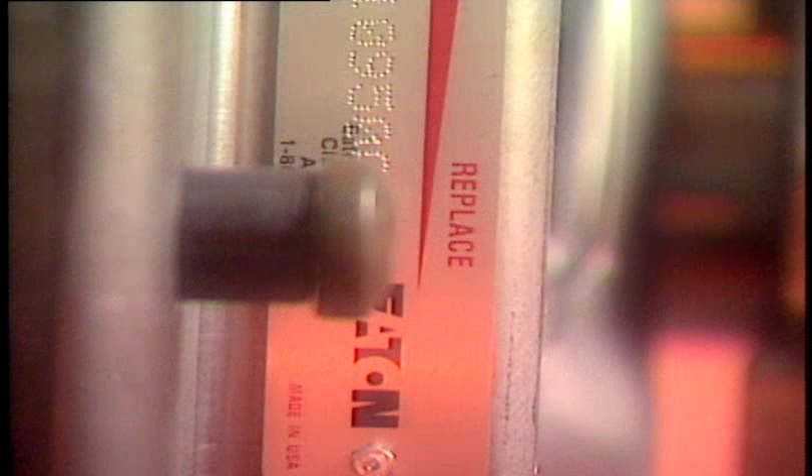Eaton Fuller stamped angle spring clutches should be replaced when adjustment cannot correct for a loss of free pedal or cannot compensate for a slipping clutch. Eaton Fuller Solo clutches should be replaced when the wear indicating tab is at the replace position.

Eaton has two versions of the Solo, one for standard stroke linkages and one for short stroke linkages. The short stroke Solo is designed for use with hydraulic type linkages and also the GM truck cable linkage system.

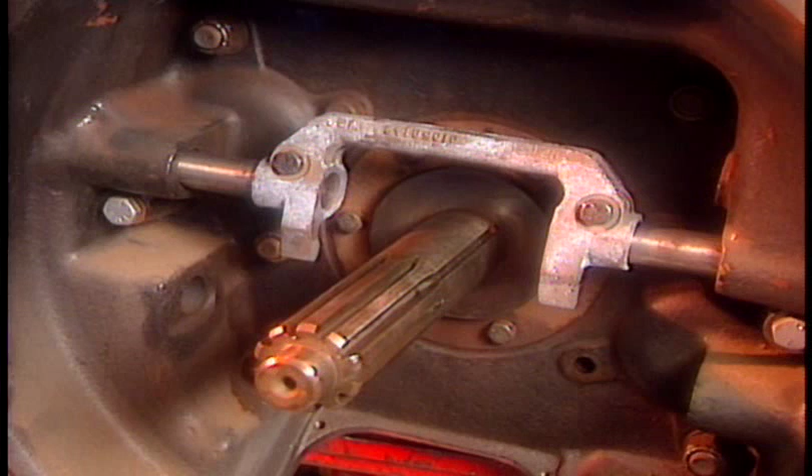Of these two types of Solo clutches, you have a choice between the original Solo or the maintenance-free version, both available in a single or double disc model. The original version uses a common release yoke combined with a greasable release bearing. This non-sealed bearing requires lubrication every 10,000 miles using an EP number 2 grease.

On the other hand, the maintenance-free version requires the use of a special roller yoke combined with a lubed-for-life release bearing. This sealed bearing requires no further lubrication. The roller yoke is packaged with the clutch. For further details, refer to the medium-duty application guide.

Attach either a sling or jack to the transmission. Next, remove the transmission mounting bolts and disconnect the external clutch linkage, making sure the release yoke will clear the release bearing as you move the transmission rearward. Don't let the rear of the transmission drop or hang unsupported. The discs can be bent or distorted, thus preventing the clutch from releasing cleanly should you desire to reuse it.

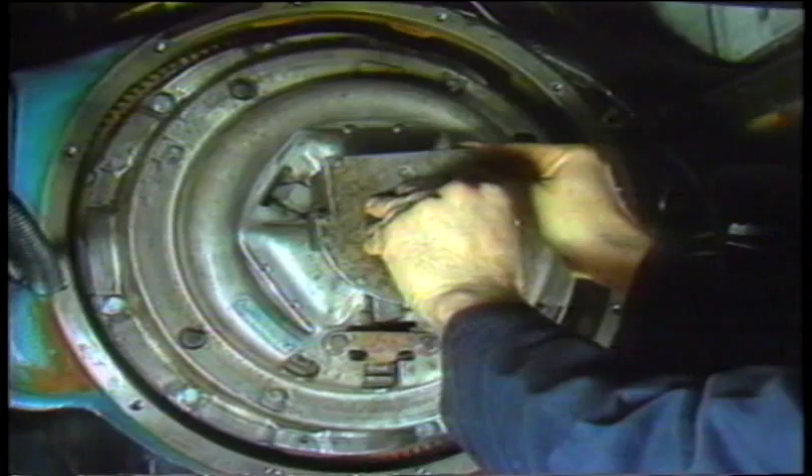Install a spline aligning tool through the release bearing, into the driven discs, and also into the inner race of the flywheel pilot bearing. You can use an old transmission input shaft for this purpose. If the clutch being replaced is a 2-plate angle spring, pull the bearing back using the release tool shown and insert 2 5/8" thick shipping blocks.

If the clutch is a single plate angle spring, insert 2 1 3/4" thick shipping blocks on the single plate model. This will prevent breaking the retainer and keep the levers from coming out of the retainer slot. Installing the wooden shipping blocks also helps ensure that the clutch will release cleanly should you wish to reinstall it.

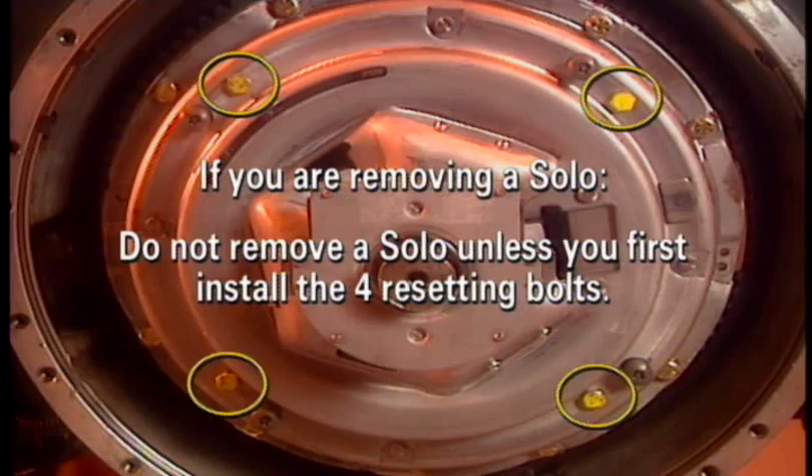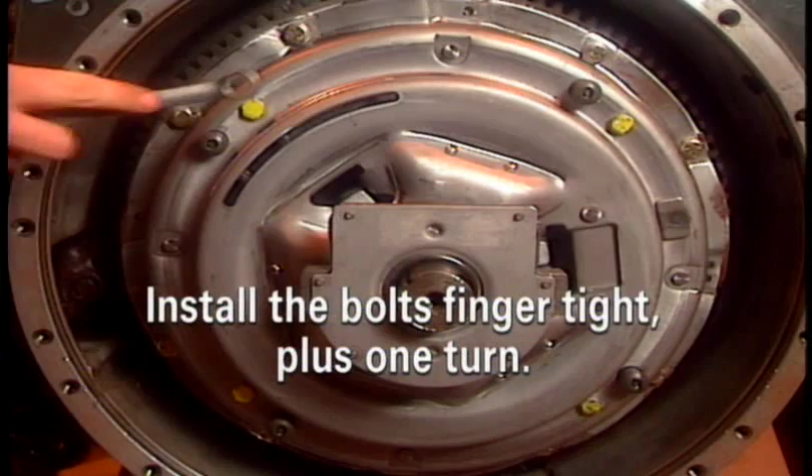If you are removing a Solo, do not unbolt the clutch from the flywheel unless you first install 4 shipping resetting bolts. The medium-duty 14-inch Solo uses size 3/8" by 16 by 1 1/4" coarse thread. Install the bolts finger tight plus 1 turn. Now you can carefully remove the clutch. The out-of-the-truck resetting procedure will be described later in this video.

Failure to first install the 4 shipping bolts prior to the clutch's removal from the flywheel will necessitate the use of this resetting procedure. Remove 2 of the mounting bolts at the top of the clutch cover and install 2 guide studs in their place. Take out the remaining 6 mounting bolts and carefully remove the clutch. Since this part is heavy, you may want to use a hoist to ensure easier handling of the clutch.

If you need to temporarily remove a Solo clutch, the following 9-step procedure must be performed prior to the clutch's removal from the flywheel. Failure to perform these steps will cause the Solo to drag or to not release upon reinstallation. Note, if the wear indicating tab is at or near the replace position, you can disregard the following 9-step process and install a new Solo clutch at this time.

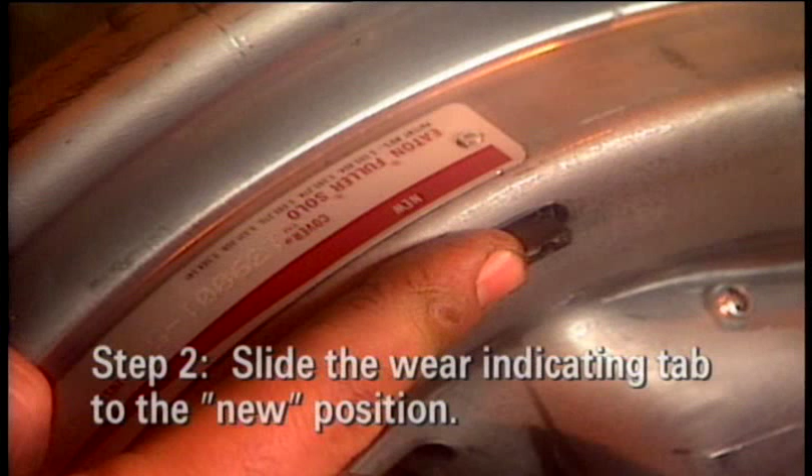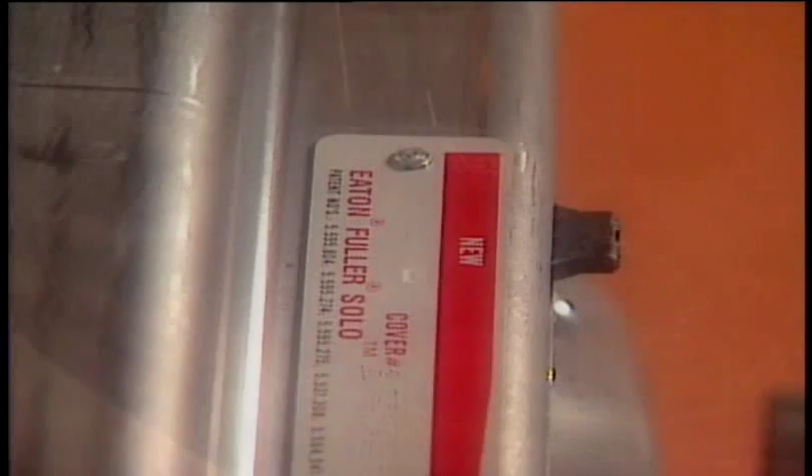Also, if the Solo clutch was removed without first installing the 4 shipping bolts and you now wish to reinstall the clutch, you must perform the out-of-truck resetting procedures described later in this video. The first step in the removal and reinstallation of a Solo clutch is to fully depress the clutch pedal and hold at this position. Next, slide the wear indicating tab to the far left and hold at this new position. Let up on the clutch pedal. The tab will remain at the new position.

Carefully remove the transmission, being sure to support its weight so that no damage will occur to the release bearing assembly and driven discs. Install 4 3/8" by 16 by 1 1/4" coarse thread machine screws finger tight. Using a 9/16" wrench, tighten each bolt one turn. These 4 shipping bolts will cage the pressure plate, thus preventing the 4 plate spacers from moving out of position during the clutch's removal from the flywheel.

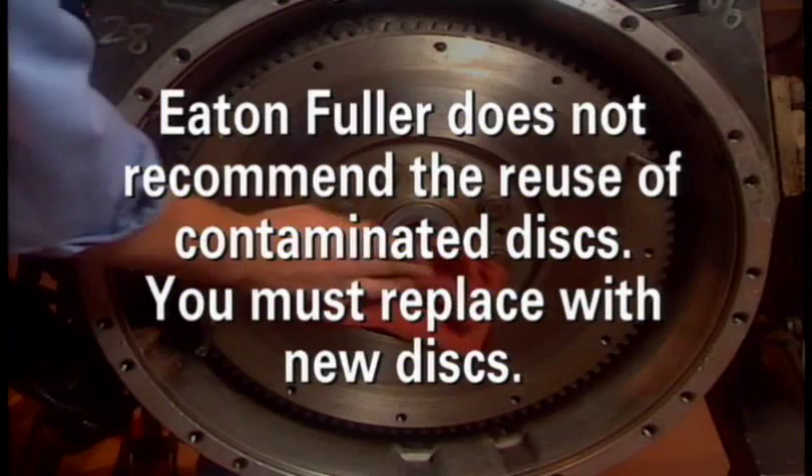Carefully remove the clutch from the flywheel, being sure to mark all the clutch parts so they can be properly oriented during reinstallation. Inspect the ceramic buttons and their mating parts for an oily or grease-covered condition, being sure to eliminate the source of this contamination before the clutch is reinstalled. Please note, Eaton Fuller does not recommend the reuse of contaminated discs. You must replace with new discs.

Using a 9/16" wrench, progressively tighten the 4 shipping bolts in a crisscross pattern until the face of the pressure plate is 525 thousandths of an inch minimum below the mounting surface. Important: failure to perform this step properly may cause the Solo clutch to drag or to not release upon reinstallation.

Reinstall the clutch according to the Solo installation procedures shown later in this video, being careful to properly reorient the clutch parts.

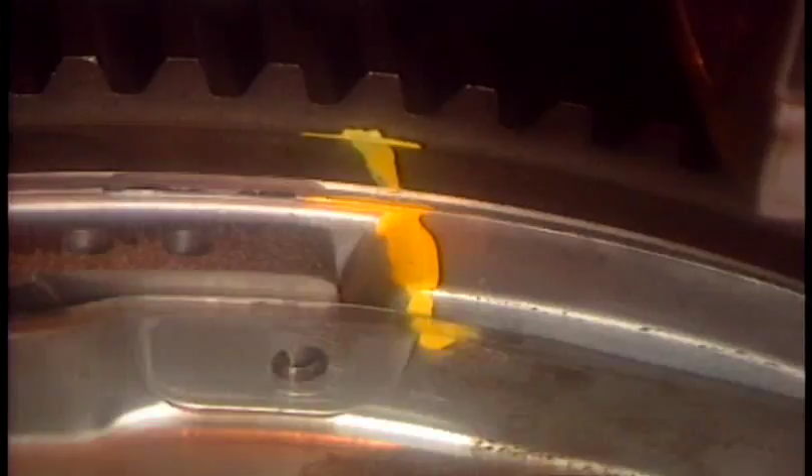Inspect the mating surfaces of both the flywheel housing and the transmission bell housing. Any appreciable wear on either housing will cause misalignment. Most wear will be found on the lower half of these surfaces, with the most common wear areas between the 3 and 8 o'clock positions. Replace the clutch housing if it is worn.

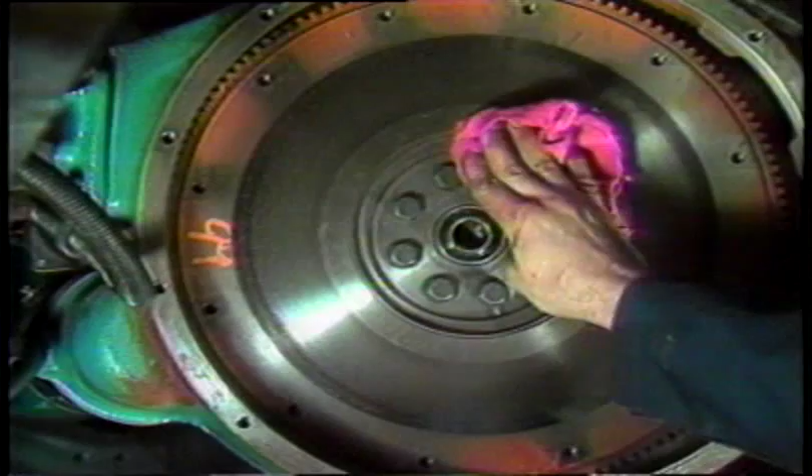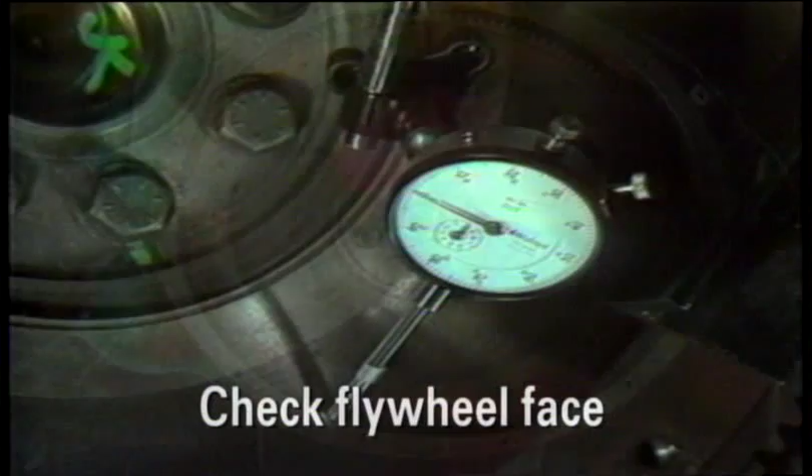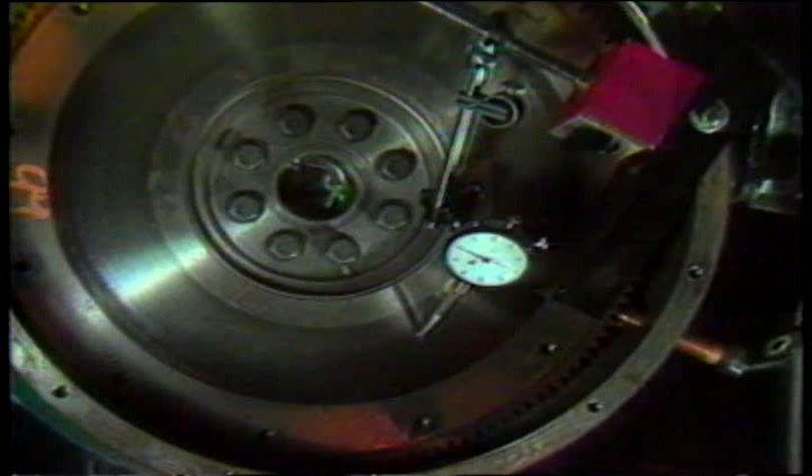Before you begin the following run-out checks, remove the 2 guide studs installed earlier and also make sure that all gauging surfaces have been wiped clean. Begin the first run-out check by securing the dial indicator's base to the engine housing with the gauge finger on the face of the flywheel. Rotate the flywheel 1 full revolution. For a Solo clutch, the maximum allowable total run-out is 7 thousandths.

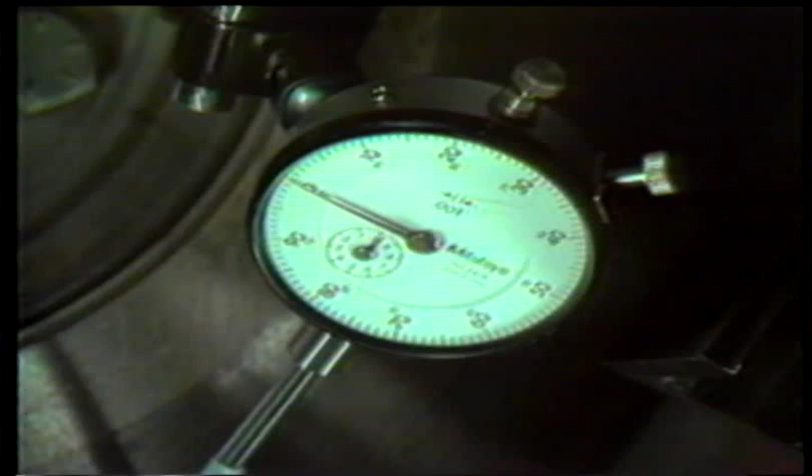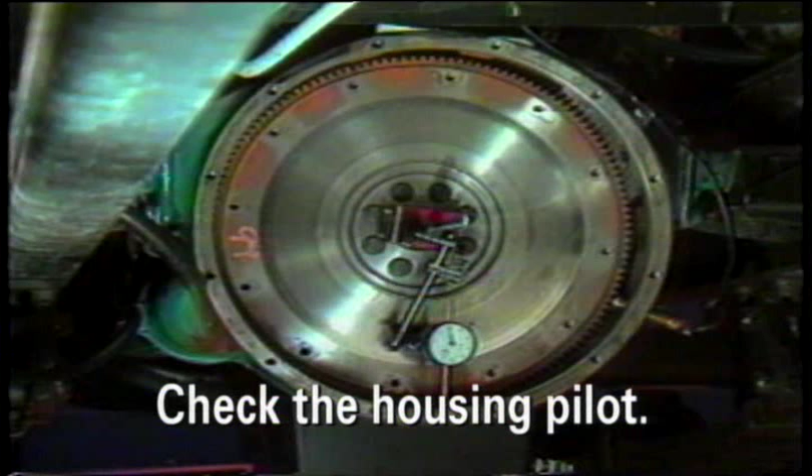Proceed to the second run-out check by moving the gauge finger so that it contacts the pilot bearing bore surface. Again, rotate the flywheel 1 full revolution. The maximum total allowable run-out is 5 thousandths. Begin the third run-out check by securing the dial indicator's base to the center of the flywheel. Next, move the gauge finger until it contacts the flywheel housing pilot. Rotate the flywheel 1 full revolution and mark the high and low points. The total indicated difference between the high and low points must be 8 thousandths or less.

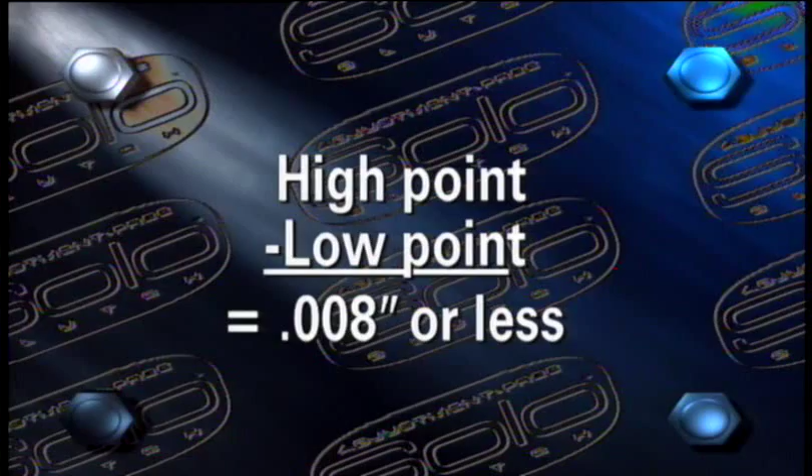For the fourth and final run-out check, secure the dial indicator's base to the outer edge of the flywheel and then move the gauge finger until it contacts the face of the flywheel housing. Again, rotate the flywheel 1 full revolution while you mark the high and low points. The total run-out should not exceed 8 thousandths. If any of the 4 previous limits are exceeded, the problem must be corrected, or the resulting misalignment will cause disc damper failures and potential damage to other drivetrain components. This completes the inspection portion of the clutch job.

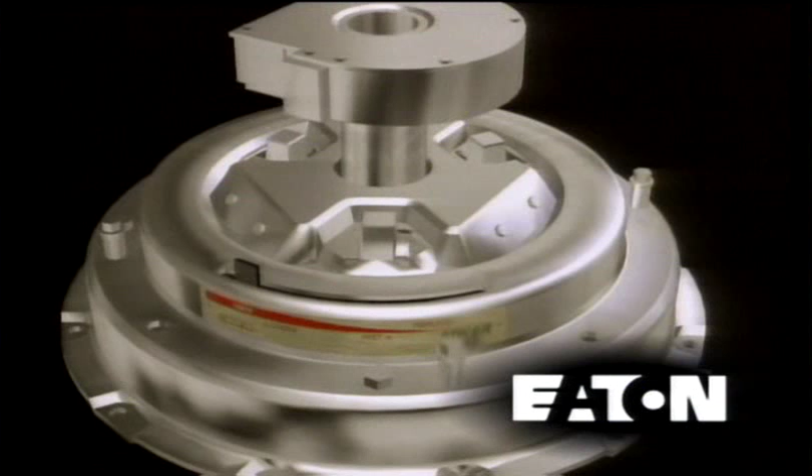A closer look at Solo's components reveals how Eaton's engineers have been able to create an adjustment-free clutch. Critical to the clutch's success are its pressure plate and plate spacers, which are exclusive to the Solo design. There are 4 plate spacers located symmetrically about the Solo. The plate spacers assure proper plate separation throughout the life of the clutch and sense the need for clutch adjustment.

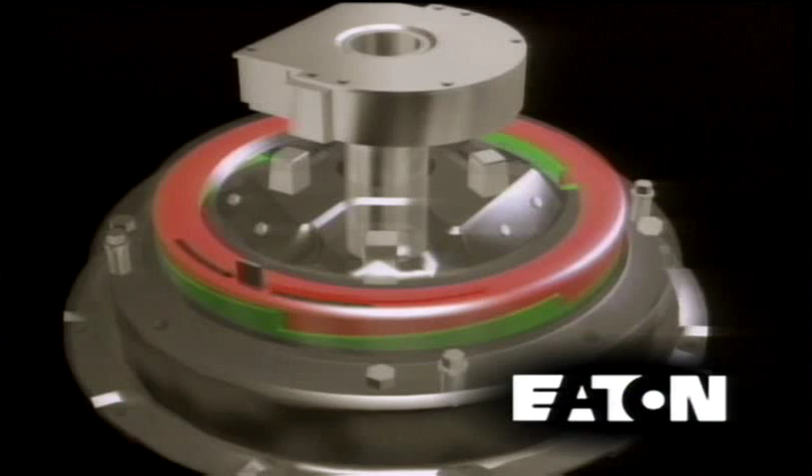Solo also includes patented cams made of a strong composite material that withstands the harshest of conditions. And because there are no threads, the possibility of frozen rings is eliminated. Atop the cams is a wear indicating tab that mirrors the movement of the cams. This highly visible tab can be seen through an opening in the bell housing to determine the remaining clutch life.

So how exactly does the revolutionary Solo work? When the installation process is completed, the transmission is installed as in the past, and the clutch linkage is hooked up. This is where it really gets easy. To set the clutch, just actuate the pedal in the cab 5 times. As the release yoke pulls the release bearing back, the cams set the release bearing to the proper position. The clutch linkage is then set to 1/8 inch between the yoke and the wear pads.

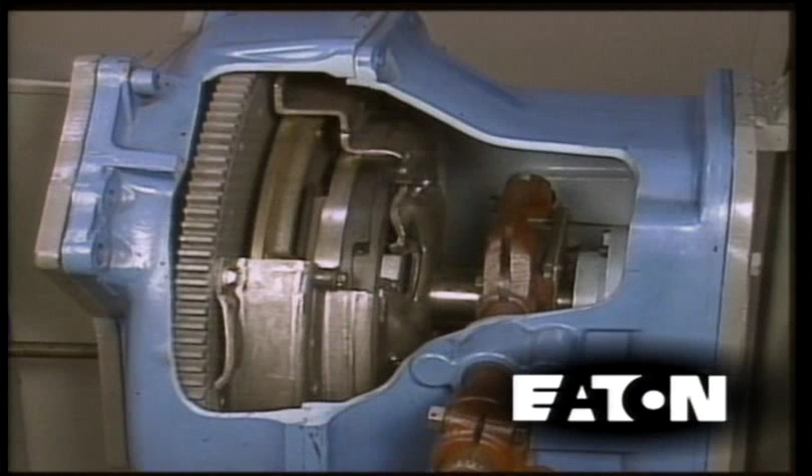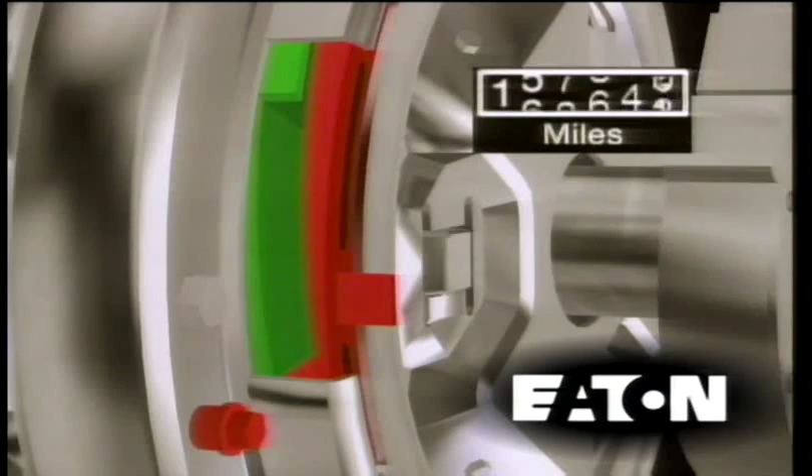Now the clutch is set, and with each ensuing push of the pedal, the cams adjust for any wear in the clutch. As wear occurs, the plate spacers will reset themselves to allow the cams to sense for wear. The plate spacers set on the engaged stroke to compensate for wear. The cams will reposition themselves on the next release stroke to compensate for the wear. When no clutch wear has taken place, the cams will not reposition.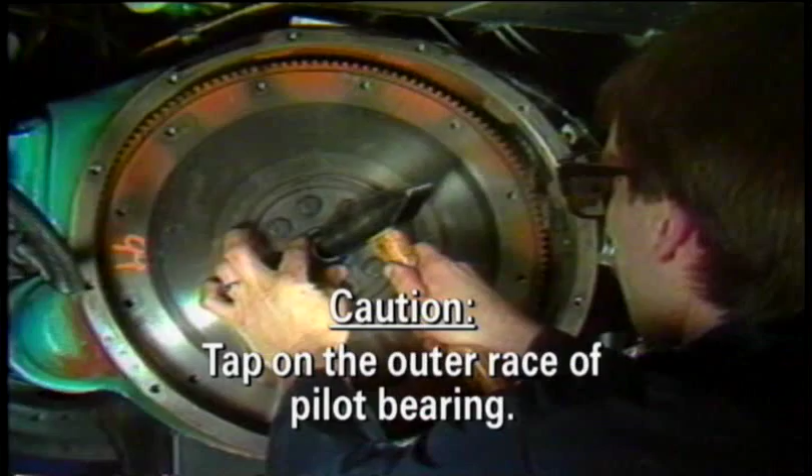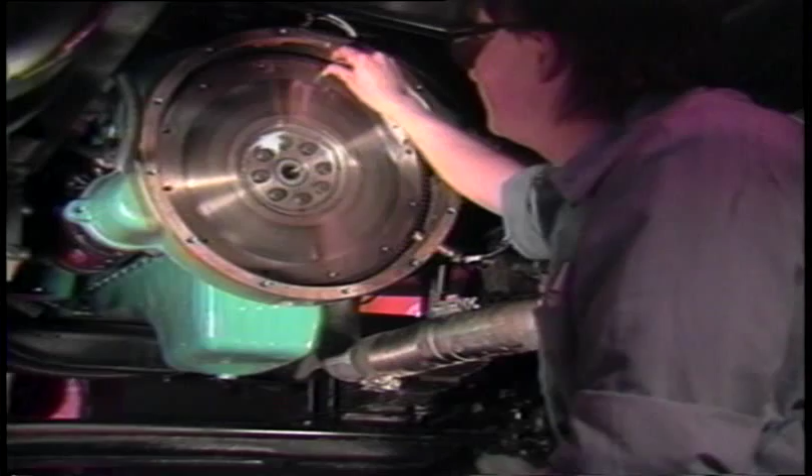Install a new premium grade pilot bearing, C3 to C4 to C5 fit. Caution: tap on the outer race of the pilot bearing only and make sure it is seated properly in the bearing bore. This bearing must have a press fit. Install 2 guide studs, 3/8 inch by 16 thread by 3 inches long. Install the disc by inserting the aligning tool through the splines and then into the pilot bearing. Make sure the side-marked pressure plate side faces the pressure plate.

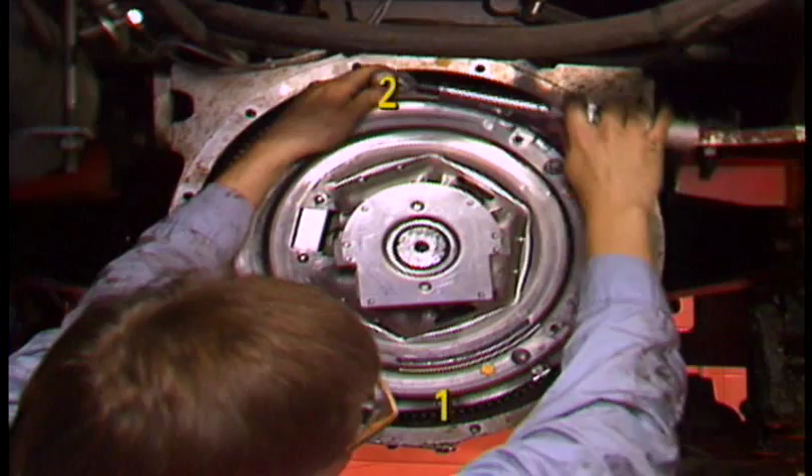With the aligning tool still in place, carefully slide the clutch assembly over the aligning tool and onto the 2 guide studs. Start 8 3/8 inch grade 5 or better mounting bolts with lock washers and tighten them finger tight. Using a torque wrench, progressively tighten the 8 bolts in a crisscross pattern by starting with the lower left-hand bolt. The final torque of each bolt should be 30 to 35 pounds-foot. Failure to tighten the bolts in this manner can cause permanent damage to the clutch cover, creating an out-of-balance condition, or cause the release bearing to be stuck rearward toward the nose of the transmission.

Remove the 4 yellow-colored shipping resetting bolts in a progressive crisscross pattern. This will allow the pressure plate to move toward the engine and will clamp the disc to the flywheel. Save these bolts for future resetting or removal of a Solo.

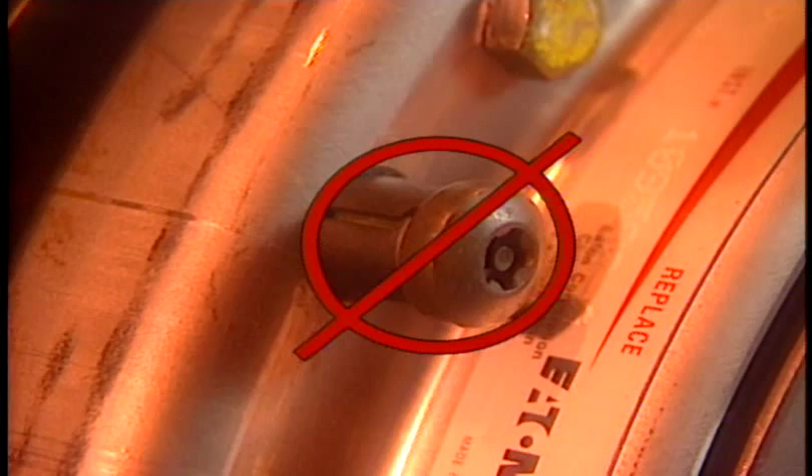Do not tamper with the 4 plate spacer bolts located next to each shipping bolt. They are designed for factory use only. Remove the aligning tool. Installation of the Solo 1401 clutch is now complete.

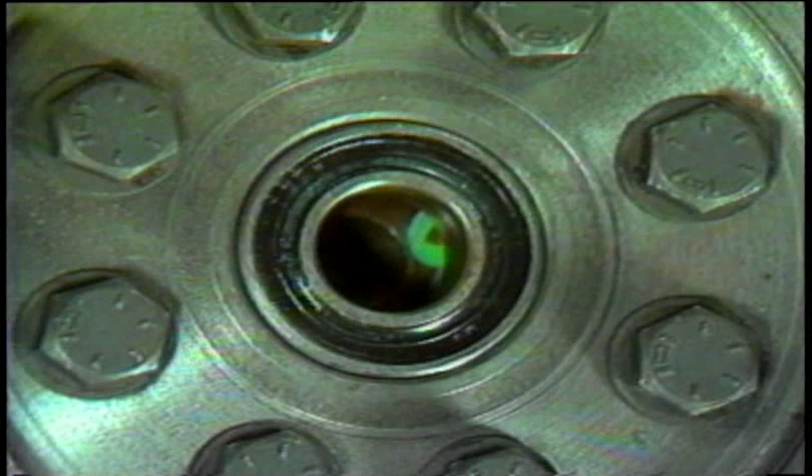Install a new premium grade pilot bearing, C3 to C4 to C5 fit. Caution: tap on the outer race of the pilot bearing only and make sure it is seated properly in the bearing bore. This bearing must have a pressed fit. Install 2 guide studs, 3/8 inch by 16 thread by 3 inches long.

Install the front disc by inserting the aligning tool through the splines and then into the pilot bearing. Make sure the side marked flywheel side faces the flywheel. Install the intermediate plate assembly over the 2 guide studs and slide it forward until it touches the flywheel. Make sure the side marked pressure plate side is facing the pressure plate. The drive straps must face the pressure plate.

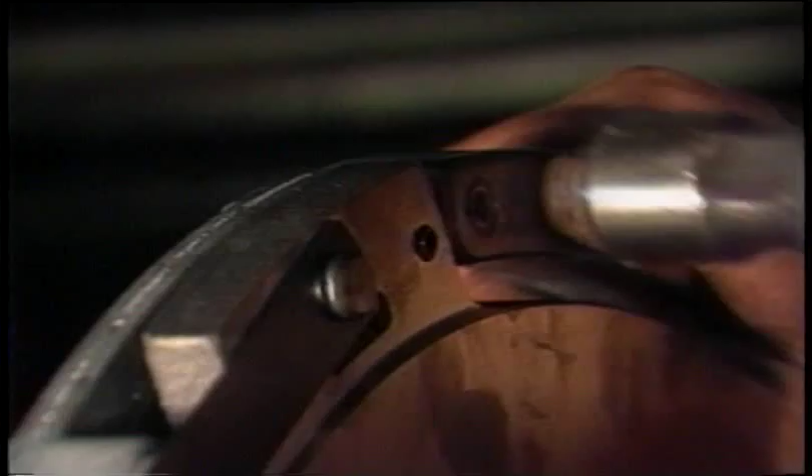Also, make sure the 4 positive separator pins in the intermediate plate are flush on the side that faces the pressure plate, protruding on the side that faces the engine flywheel. Remove the aligning tool and install it through the splines of the rear disc. Insert the aligning tool through the front disc and then into the pilot bearing.

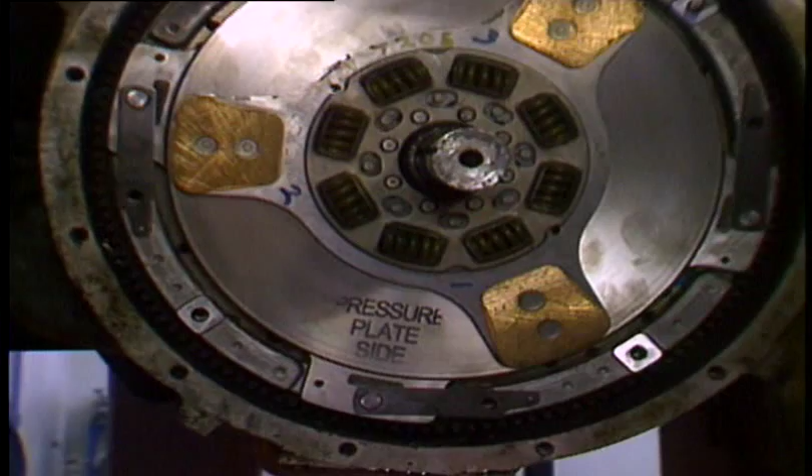Make sure the side of the disc marked pressure plate side is facing the pressure plate. As you perform this step, align the buttons of the front and rear discs as closely as possible. Doing so will aid the function of the positive separator pins. With the aligning tool still in position, carefully slide the clutch assembly over the aligning tool and the 2 guide studs until it rests against the intermediate plate assembly.

Start 8 3/8-inch grade 5 or better mounting bolts with lock washers and tighten them finger tight. Using a torque wrench, progressively tighten the 8 bolts in a crisscross pattern by starting with the lower left-hand bolt. The final torque of each bolt should be 35 to 40 pound-feet. Failure to tighten the bolts in this manner can cause permanent damage to the clutch cover or create an out-of-balance condition.

Remove the 4 yellow-colored shipping resetting bolts in a progressive crisscross pattern. This will allow the pressure plate to move toward the engine and clamp the discs to the flywheel. Save these bolts for future resetting or removal of a Solo. Do not tamper with the 4 plate spacer bolts located next to each shipping bolt. They are designed for factory use only. You may now remove the aligning tool.

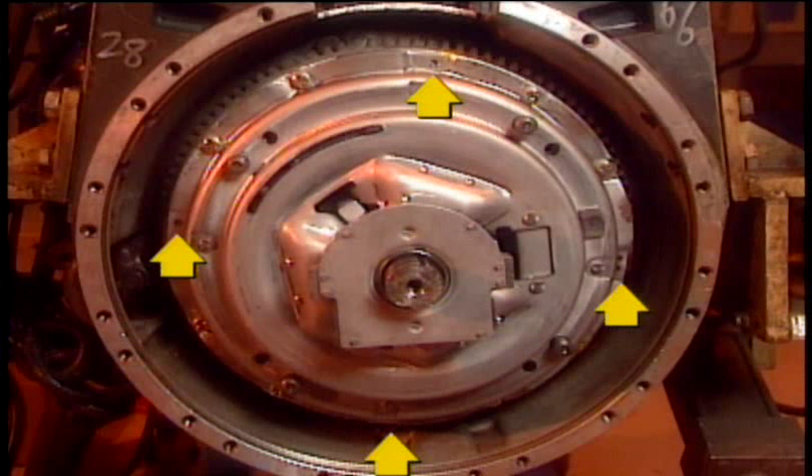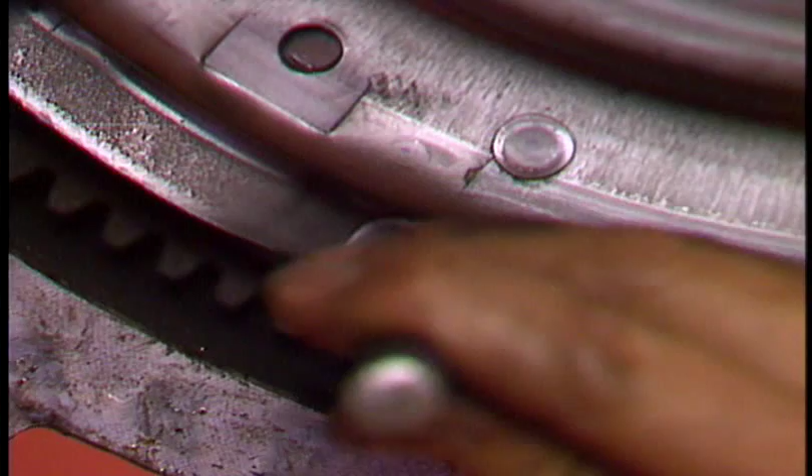Using a lightweight hammer and a 1/4 inch flat-nosed punch, lightly tap the 4 positive separator pins via the access holes on the clutch cover until each pin is touching the flywheel. Failure to set these pins properly will cause the clutch to drag, resulting in a poor release complaint. Installation of the Solo 1402 clutch is now complete.

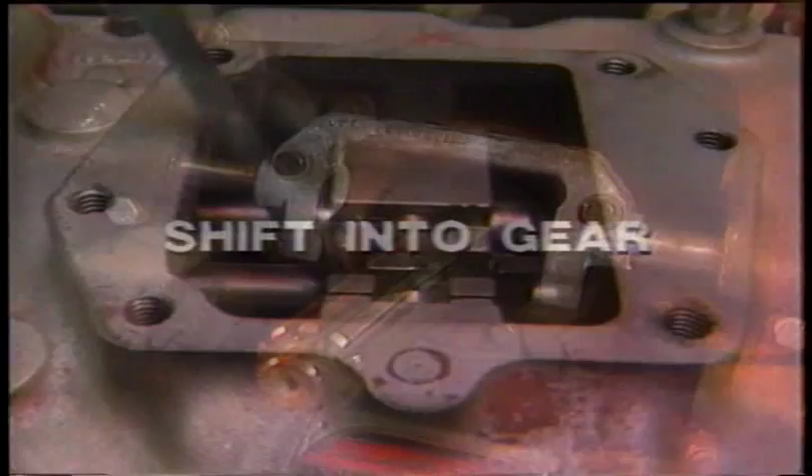Before installing the transmission, make sure it has been shifted into gear. If the truck is equipped with a non-synchronized transmission, install a new Eaton Fuller clutch brake at this time, being sure to check the front of the transmission bearing cap for excessive wear. Replace the cap if worn excessively. Clutch brakes will never be used with synchronized transmissions.

Check the release yoke fingers for excessive wear. Replace if worn excessively. Coat the yoke fingers with grease to prolong the life of both the fingers and also the wear pads on the release bearing. Check the cross shafts and bushings for excessive wear.

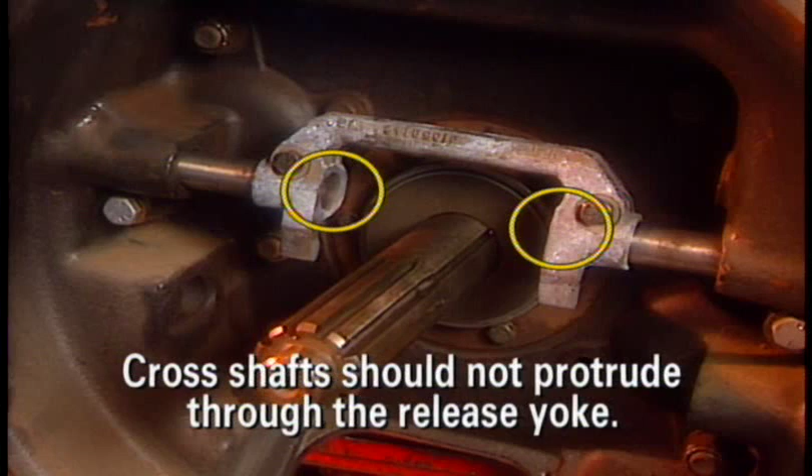Replace if worn excessively. Make sure the cross shafts do not protrude through the release yoke, since this could cause a side-loading condition between the release bearing sleeve and the transmission input shaft. Excessive wear at the cross shafts and bushings can also lead to a side-loading condition, which may result in a poor release complaint.

There should be zero wear on the input shaft splines. Even slight wear can cause a non-release condition once the new driven discs have been installed over the worn splines. Do not apply grease or anti-seize on the input shaft. Use only a light coat of oil to aid in installation.

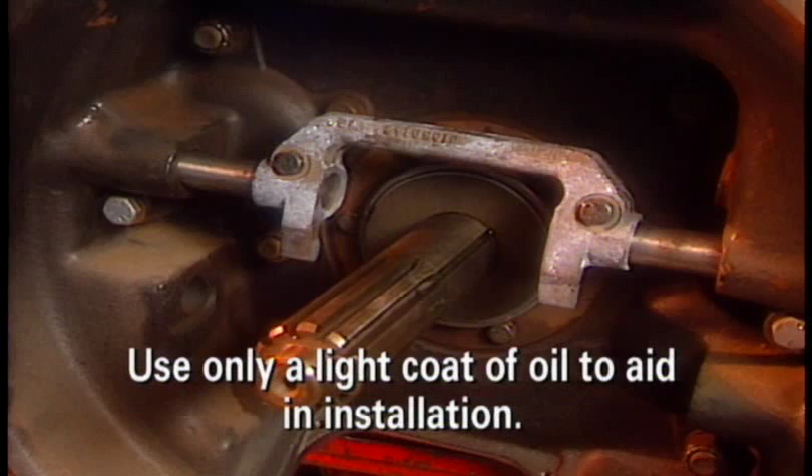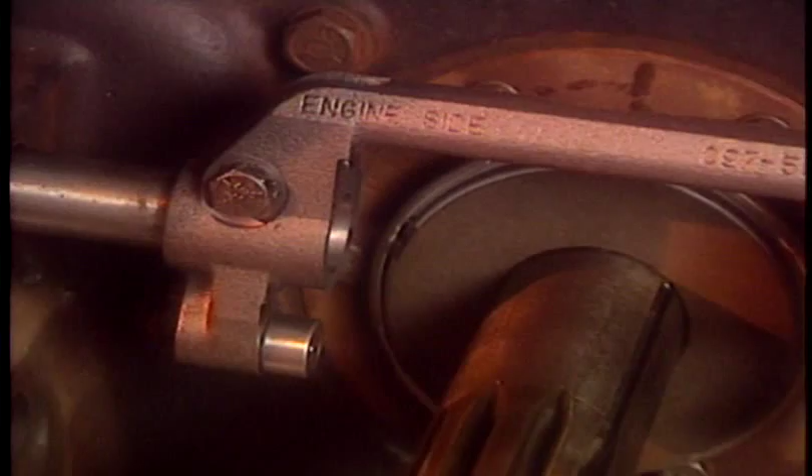Check for worn linkage pivot points. Replace any parts which are worn excessively. If you have installed a maintenance-free version of the Solo clutch, you must install the roller-type yoke package with this clutch. It is a specially designed release yoke which will function only with the maintenance-free Solo. Important: the roller yoke must be installed with the engine side notation facing the engine.

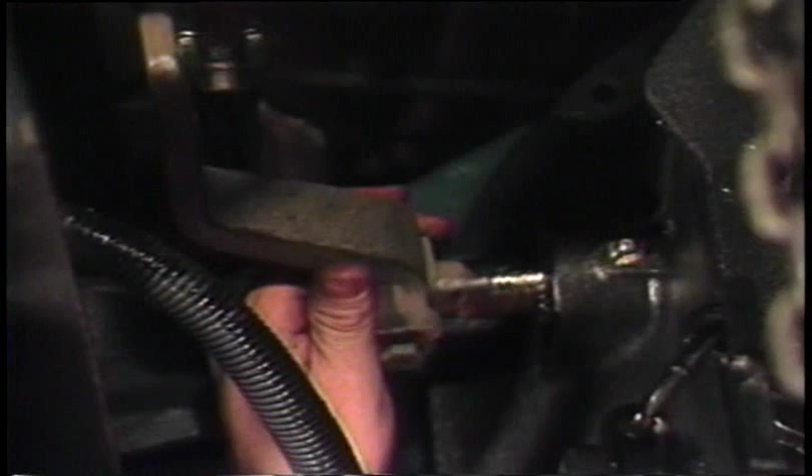Make sure that the transmission is square to and aligned with the engine when it is raised into position. Lift the release yoke so that it clears and is rotated over the wear pads of the release bearing as the transmission is moved forward. Be careful. The release yoke fingers must be elevated to the straight out position. Both the clutch cover and release yoke fingers can become damaged when moving the transmission forward.

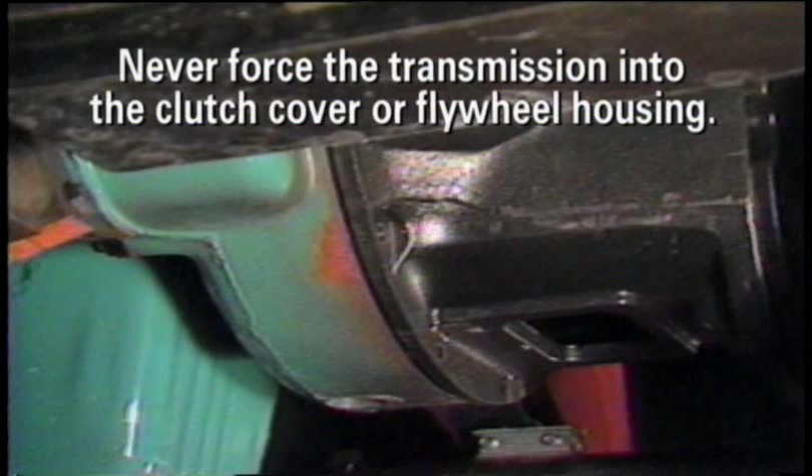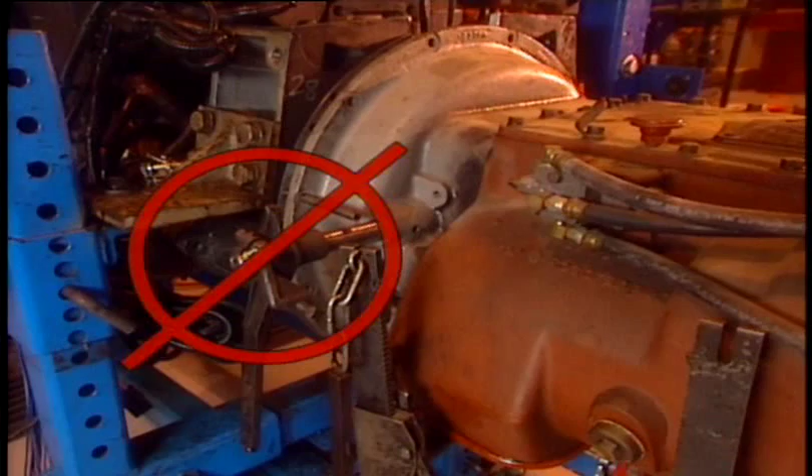Move the transmission forward, but never, and we repeat, never force the transmission into the clutch cover or flywheel housing. If it doesn't enter freely, investigate the cause and make any necessary changes. Do not use the clutch release arm to pull the transmission into the engine housing. Doing so will cause the release bearing to adjust too closely to the transmission bearing cap or clutch brake. As a result, you might experience a dragging clutch due to shortened bearing travel.

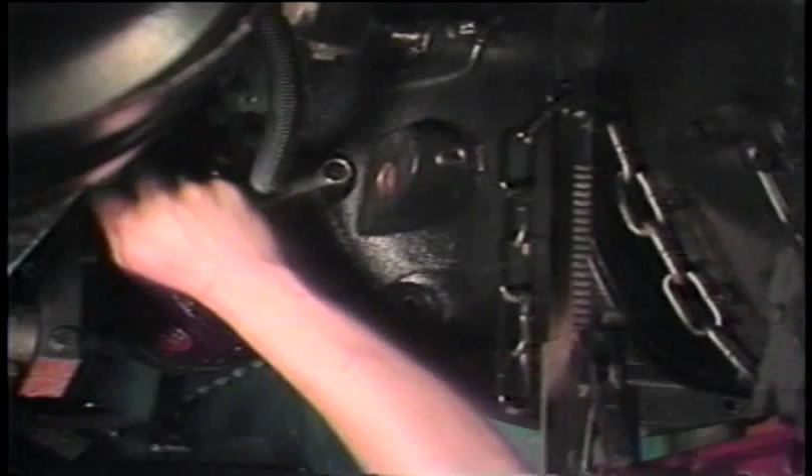Do not let the rear of the transmission drop or hang unsupported in the driven discs. The discs can be bent or distorted and will cause a no-release condition or broken damper disc. Mate the transmission with the engine flywheel housing and install the mounting bolts. Torque the bolts based upon the manufacturer's recommendations. This completes the transmission portion of the clutch job.

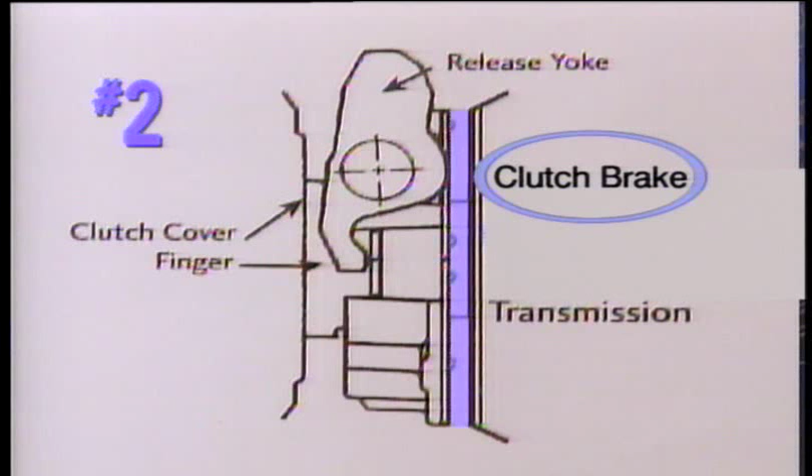To properly set up the Solo, the yoke must move the release bearing until one of the following occurs. 1. The bearing hits the transmission nose. 2. The bearing hits the clutch brake. This is for non-synchronized transmissions. 3. The bearing cannot be further moved and has hit the internal stop of the clutch cover.

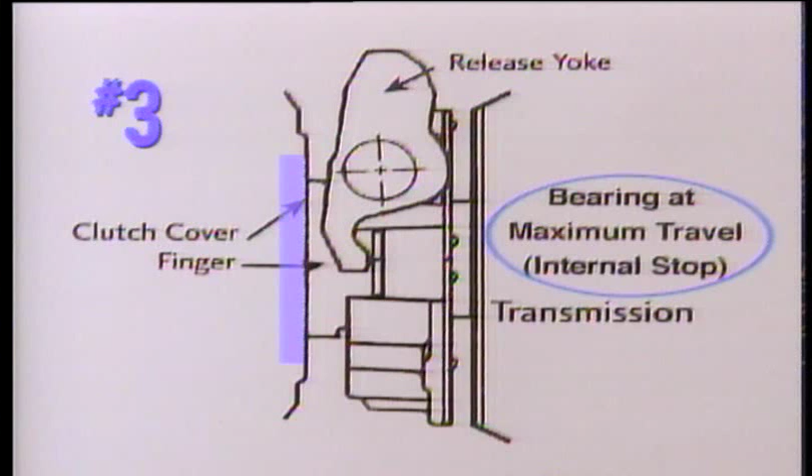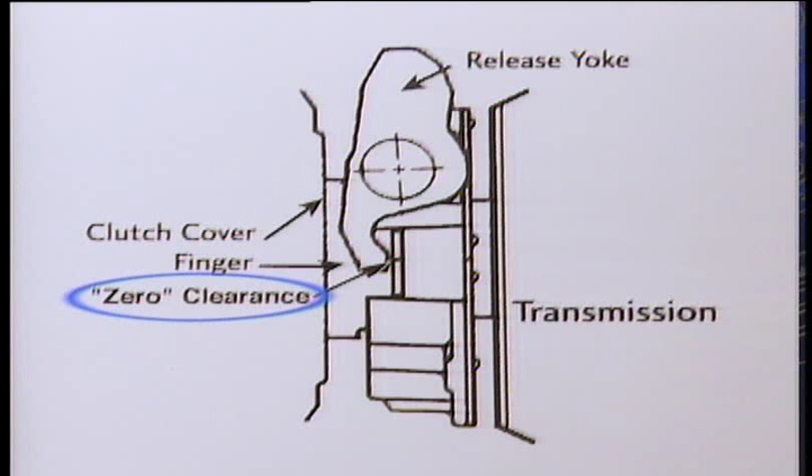Adjust the truck linkage until you have zero clearance between the release bearing wear pads and release yoke. Setting the yoke to contact the bearing pads will allow for maximum stroke to the bearing and allow the clutch to set itself to the specific truck. The bearing must move slightly more than 9/16 of an inch in order for the Solo to adjust fully. Fully depress and release the clutch pedal in the cab 5 times.

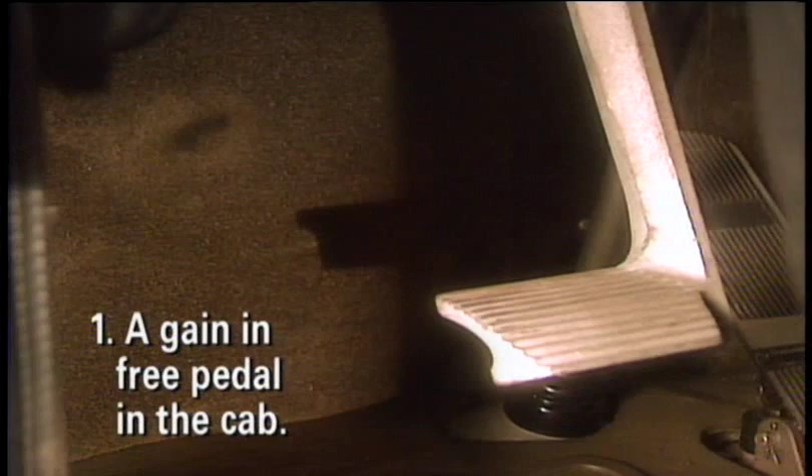Indications that the Solo is adjusting will be: 1. A gain in the free pedal in the cab. 2. Movement of the wear indicator on the clutch away from the new position slightly toward the replace position. 3. The release bearing seats itself closer to the transmission nose.

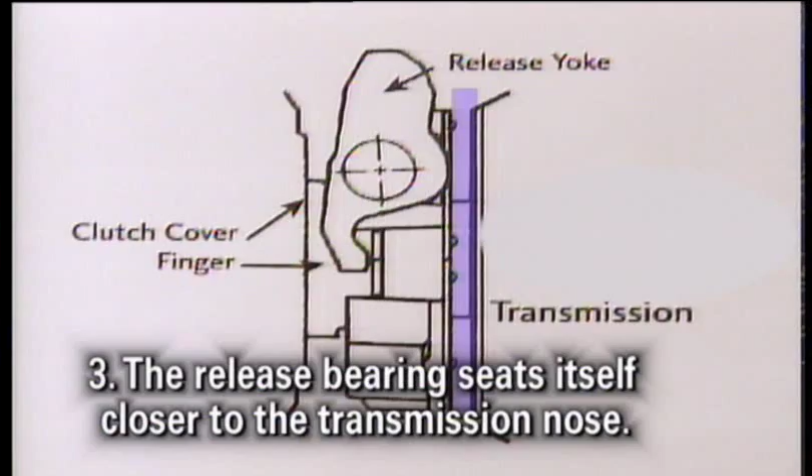Note, the Solo will set itself based on the distance you pull the bearing. Do not attempt to adjust the bearing position by prying or hitting on the wear indicator, for it is easily broken off. In addition, manually moving the wear indicating tab will not alter the final position of the release bearing. The wear indicator is a visual indication of when to replace the clutch. If the tab has been broken, it has no effect on the function or life of the clutch.

If the bearing movement is not stopped at the end of the stroke by the transmission, clutch brake, or internal stop, again reset the yoke clearance to 0 and again depress and release the pedal 5 times. Any gain in free play in the clutch pedal indicates that this second adjustment was necessary. The Solo should now be fully adjusted.

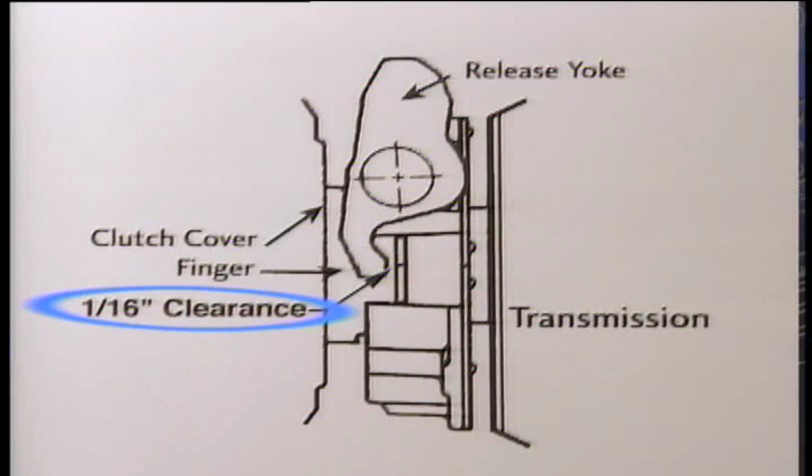The next step is to adjust the truck linkage and create a minimum of 1/16 inch clearance between the release yoke fingers and the bearing pads. This setting will create the correct free pedal in the cab. In some trucks, the pedal may stop off the floor. This is an acceptable condition and is a result of a linkage designed for maximum bearing movement.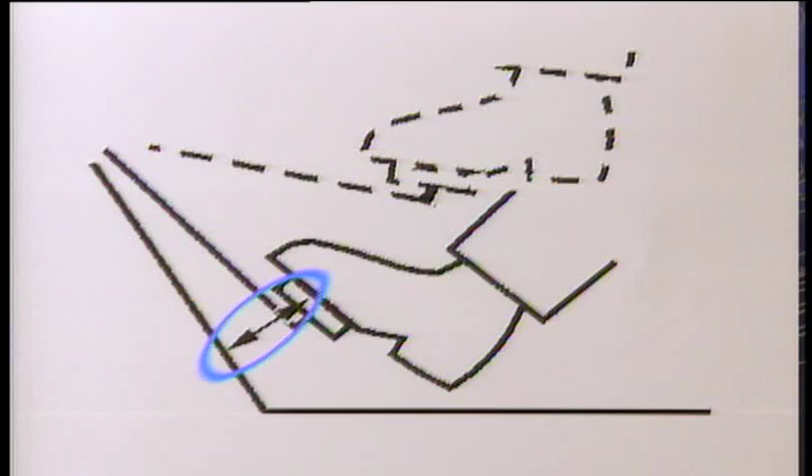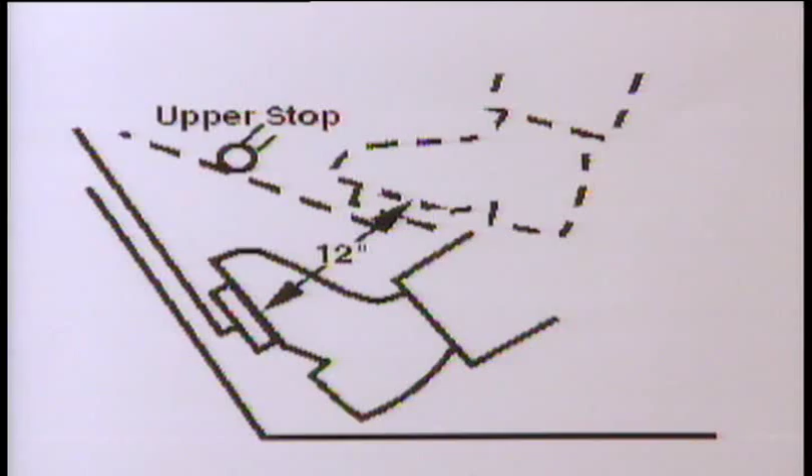However, if you prefer to lower the pedal at the end of the stroke, you must reduce the total in-cab pedal movement. For example, if you have a 12-inch pedal movement, lower the pedal 1 inch to create an 11-inch pedal movement. This will lower the pedal by 1 inch at the end of the stroke. You may need to modify or adjust the upper pedal stop bumper. Now reset the 1/16 inch minimum clearance between the release yoke and bearing.

If a clutch brake is used, verify that the clutch brake squeeze begins approximately 1/2 inch to 1 inch from the end of the pedal stroke. Adjusting the linkage to decrease the amount of free travel will increase the amount of clutch brake squeeze. Inversely, adjusting the linkage to increase the amount of free travel will decrease the amount of clutch brake squeeze. Note, clutch brake squeeze should be verified by inserting a 10/1000 feeler gauge between the bearing and clutch brake.

Lubricate the release bearing until lube purges out of the opening onto the transmission shaft. This will lube the bearing and bushing. Apply lube to the release yoke fingers as well as the cross shafts.

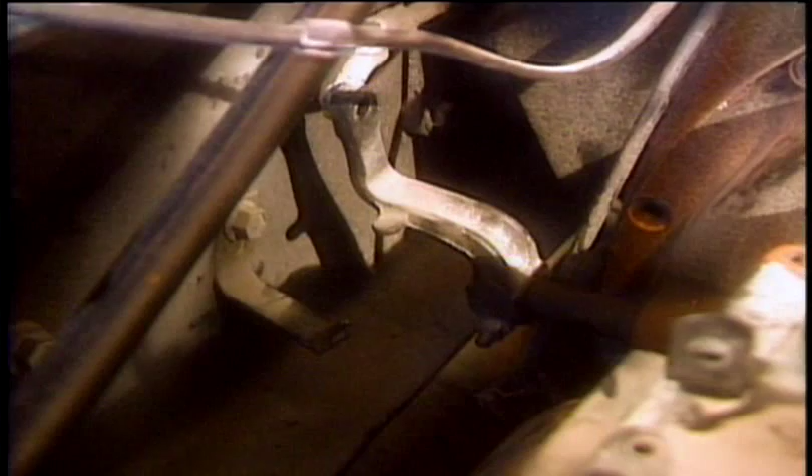If you can access the external clutch arm attached to the cross shaft, you can use the alternative setup procedure. Place a pipe or tool over the release arm and rotate the cross shaft to move the release bearing toward the transmission until it stops. The bearing should be moved until it contacts the transmission nose, hits the clutch brake, or is limited by the internal stop inside the clutch. Repeat this procedure 5 times.

Indications that the Solo is adjusting will be: 1. Movement of the wear tab from the new position slightly toward the replace position. 2. The release bearing will seat itself closer to the transmission nose. And 3. There will be an increase in free play at the clutch pedal.

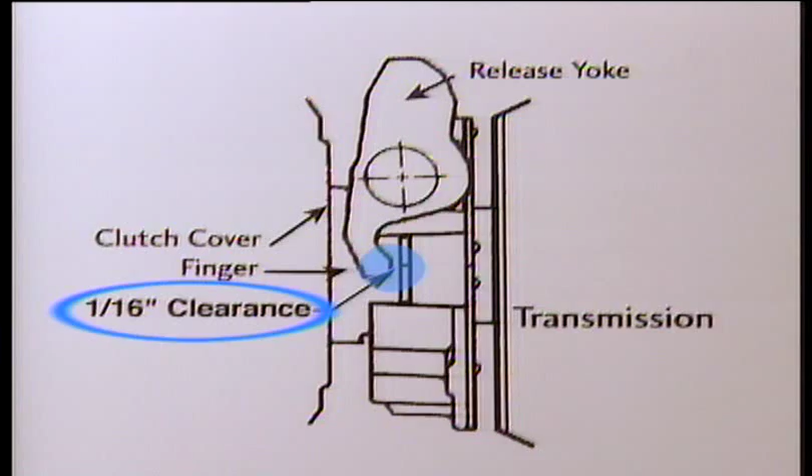Now install the truck linkage. Adjust the linkage to set the clearance between the release yoke fingers and the release bearing pads to a minimum of 1/16 inch. This will create the correct free pedal in the cab. Note, the Solo will set itself based on the distance you pull the bearing.

Do not attempt to adjust the bearing position by prying or hitting on the wear indicator, for it is easily broken off. Also, manually moving the wear indicating tab will not alter the final position of the release bearing. The wear indicator is a visual indication of when to replace the clutch. If the tab has been broken, it has no effect on the function or life of the clutch.

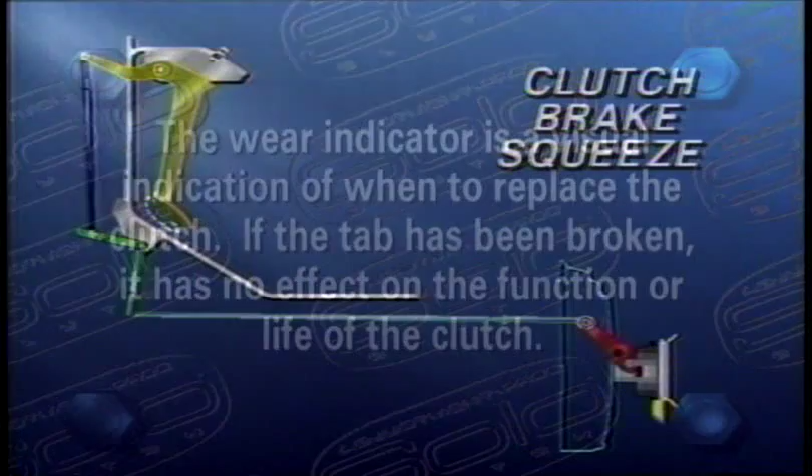If a clutch brake is used, verify that the clutch brake squeeze begins approximately 1/2 inch to 1 inch from the end of the pedal stroke. Adjusting the linkage to decrease the amount of free travel will increase the amount of clutch brake squeeze. Inversely, adjusting the linkage to increase the amount of free travel will decrease the amount of clutch brake squeeze.

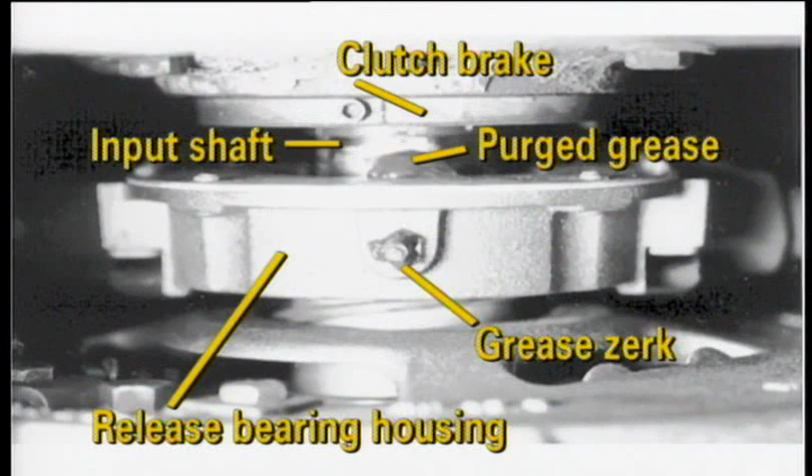Lubricate the release bearing until lube purges out of the opening onto the transmission input shaft. Including the release bearing, this excess grease will also prolong the life of the bronze bushing inside the release sleeve. Do not be concerned if grease gets onto the clutch brake, since it will not affect the brake's ability to stop the input shaft. Apply lube to the release yoke fingers, as well as the cross shafts.

The following resetting procedure is necessary if you: 1. Remove the clutch from the flywheel without first installing the 4 shipping bolts, and 2. Now wish to reinstall the Solo clutch. Failure to observe the following resetting procedures will prevent the clutch from releasing upon reinstallation. Please note, for future reference, this information is also available in the installation and adjustment wall charts packaged with each Solo clutch.

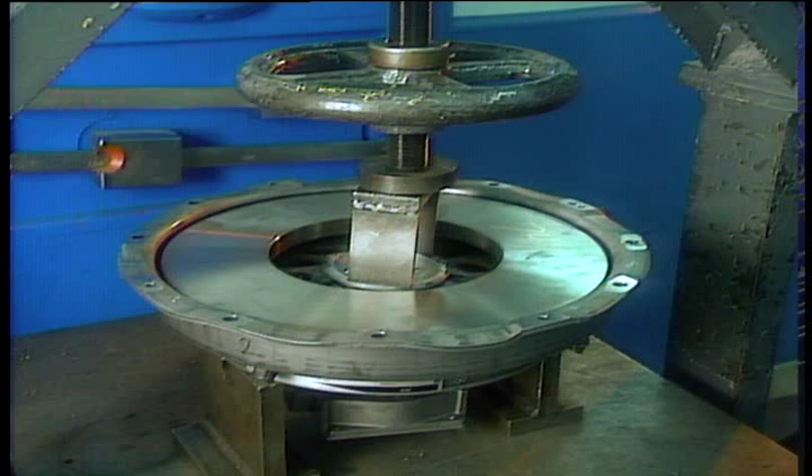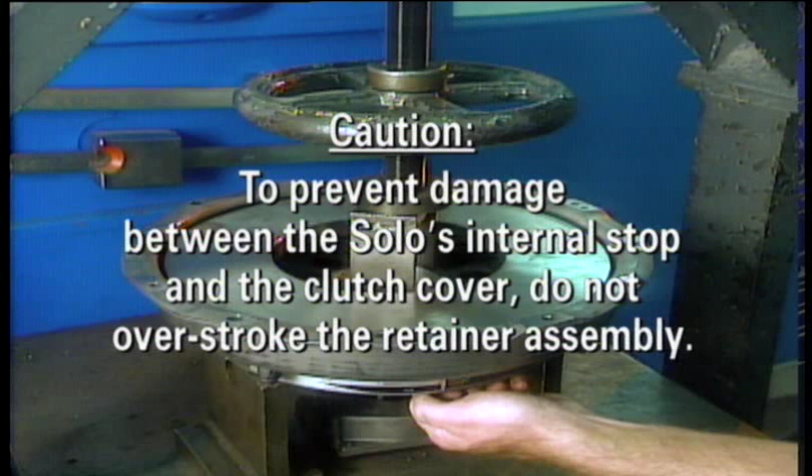Support the clutch in an arbor press, allowing approximately 1 inch of space beneath the release bearing. Center the ram and move the retainer downward until you can slide the wear indicating tab to the new position. Caution: to prevent damage between the Solo's internal stop and the clutch cover, do not overstroke the retainer assembly.

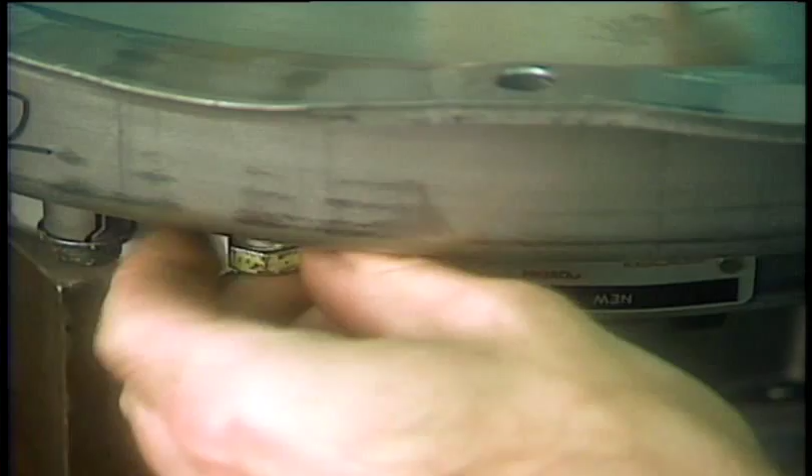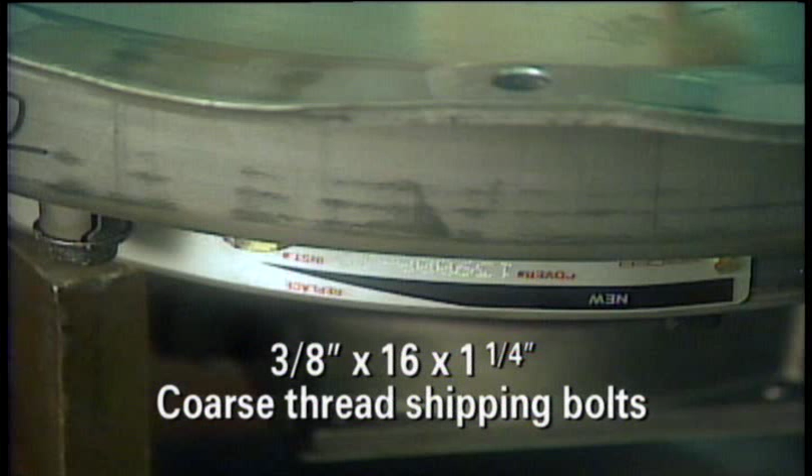While holding the tab at its new position, install 4 3/8 by 16 by 1 1/4 inch coarse thread shipping bolts until they are finger tight. A magnet can be used to hold the tab while installing these bolts. You may now retract the arbor press ram.

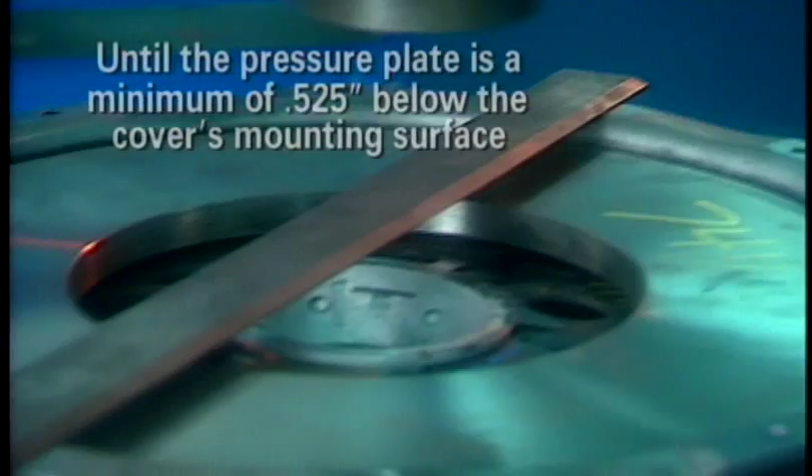Using a 9/16 inch wrench, progressively hand tighten these 4 shipping bolts until the face of the pressure plate is a minimum of 525 thousandths below the cover's mounting surface. This will allow the 4 plate spacers to be repositioned. Note: failure to perform this step properly may cause the Solo clutch to drag or to not release upon reinstallation.

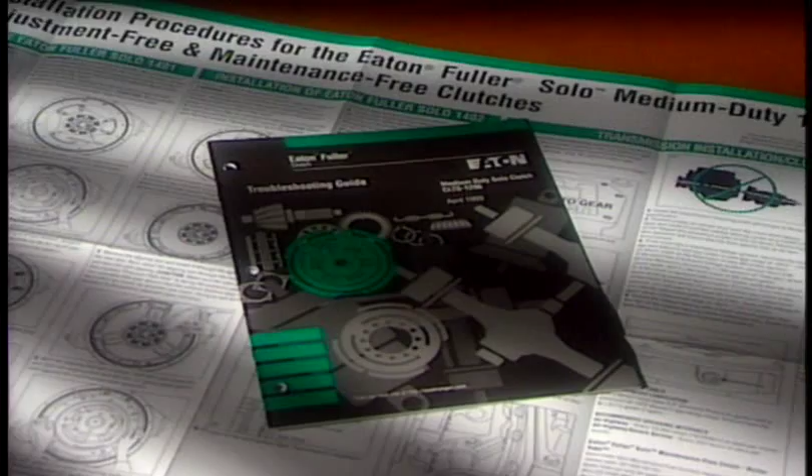For additional technical information, refer to both the installation and adjustment wall chart packaged with each Solo clutch and the troubleshooting guide. Warning: the major cause of clutch failure is excessive heat. Excessive heat generated from the flywheel, driven discs, intermediate plate, and pressure plate can cause the metal to flow and the friction material to be destroyed. If this occurs, the clutch can burst, resulting in property damage, serious bodily injury, or death.

Recommended vehicle loads should not be exceeded. The clutch should be used only for recommended applications. Drivers should be properly trained in the starting, shifting, and operation of the clutch. Drivers should report erratic clutch operation as soon as possible to permit maintenance personnel to inspect, adjust, or lubricate as required. Mechanics must be familiar with the proper clutch adjustment, linkage adjustment, lubrication, and other maintenance and troubleshooting procedures outlined in the Failure Analysis Guide and the Eaton Service Manual.